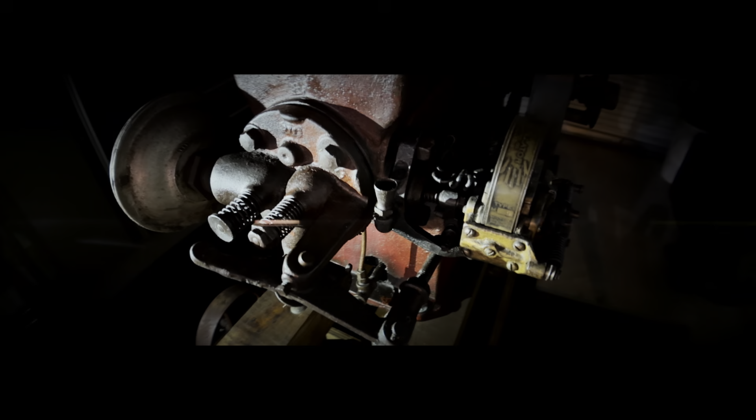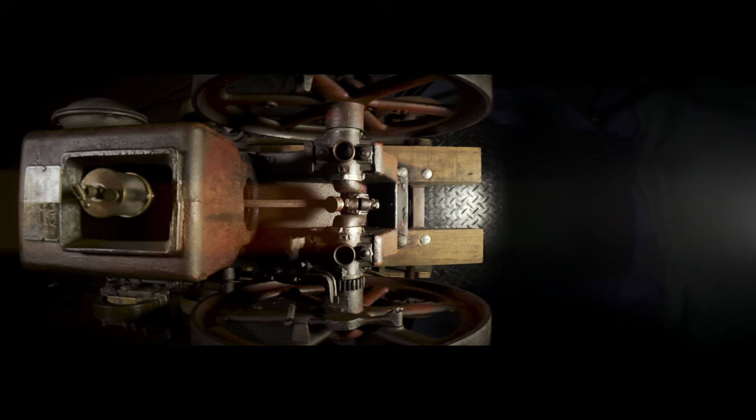This old thing, with all of its parts exposed and painted barn red, at least what's left of the paint anyway. This old thing is a hit-and-miss stationary engine built in 1915. And I need to tell you right now that I really like this old thing. I like it as much as a fat kid likes cake, and the last time I checked, that's quite a lot. And this old thing is up next on Shit Gets Fixed.

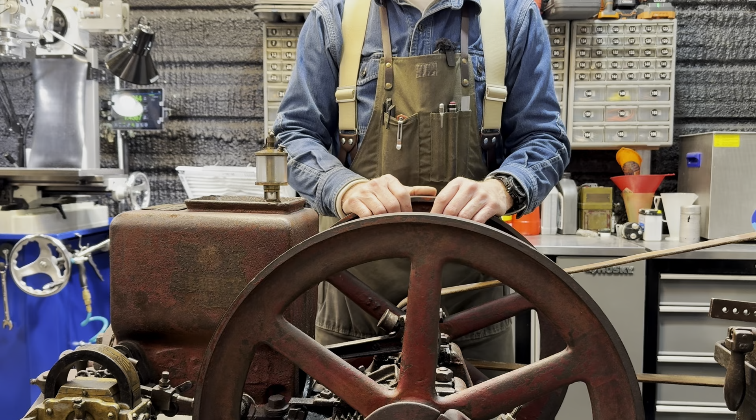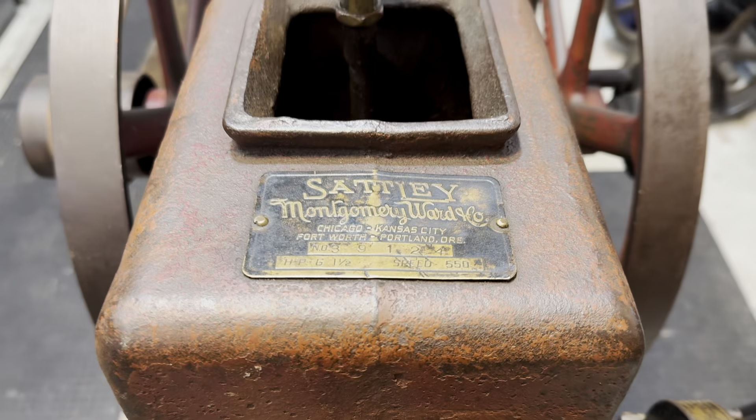We are going to fix some shit on the 1915 Sattley hit and miss. And to get us started, I have a little bit of hit and miss history for us. So, in 1915, you could order one of these Sattleys through the Montgomery Ward catalog. It even says Montgomery Ward right here on the name tag. Hit and miss engines were used from the 1890s through the late 1930s, primarily in rural parts of America. These engines would be connected to other machines by a flat leather belt, and they would run water pumps, generators, even some ran washing machines. And you could say they were nothing short of a game changer on the early American farm.

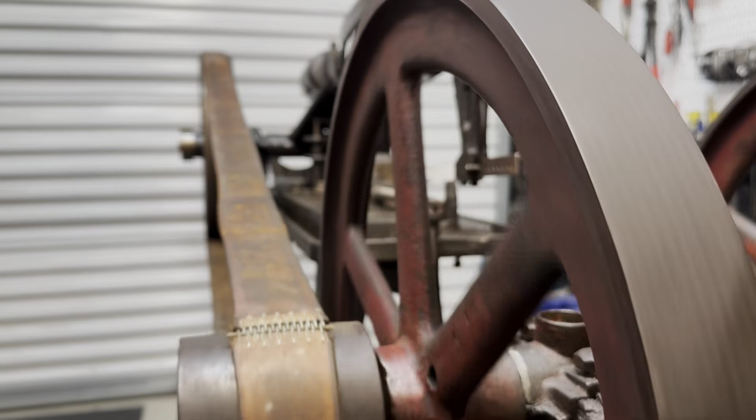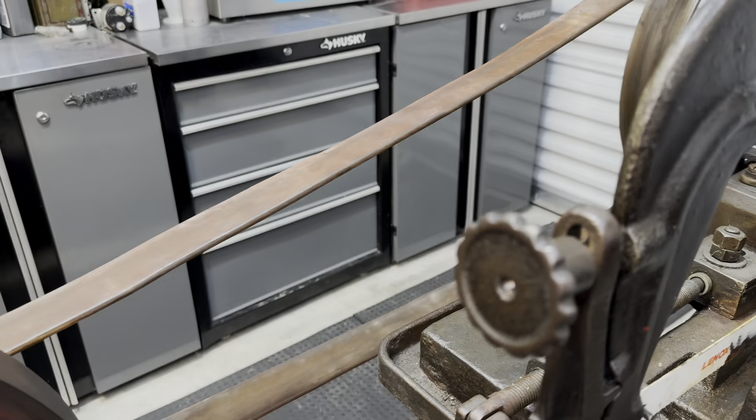And speaking of this flat leather belt interconnection, I've taken this opportunity to connect the Sattley, albeit kind of a mock-up, with this. This is a flat belt driven power hacksaw built in 1909 by the Racine Gas Engine Company of Racine, Wisconsin. I did this so you could see how hit and miss engines' power would be transferred via that flat belt to another machine, like the 1909 power hacksaw. Man, that's neat!

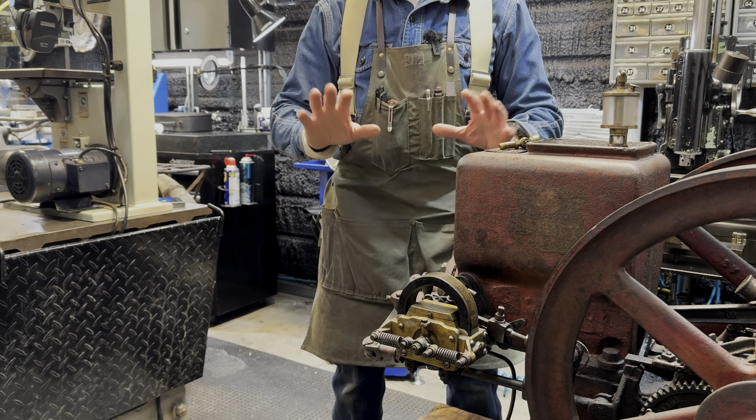So the shit we need to fix is as follows. First, we need to install this. This is a primer cup. I'll talk about what this does when we get there. We also need to set the ignition timing, but before we can do any of that, we need to do some repair work on the Webster tripolar oscillator. And no, I didn't just make that up. The Webster tripolar oscillator is actually a thing. So I'm going to get after removing the Webster from the Sattley so we can fix that shit. And while I'm doing that, I'm going to send you over to the inspection stand so you can review the typical 4-stroke combustion process, and then I'll bring you back over here so we can talk about how hit and miss engines manipulate that process.

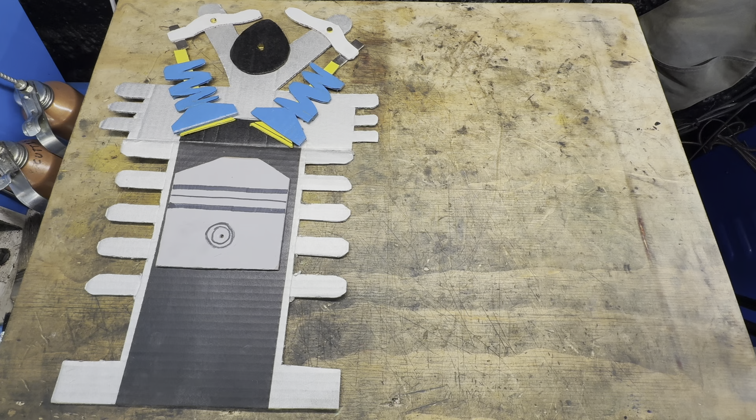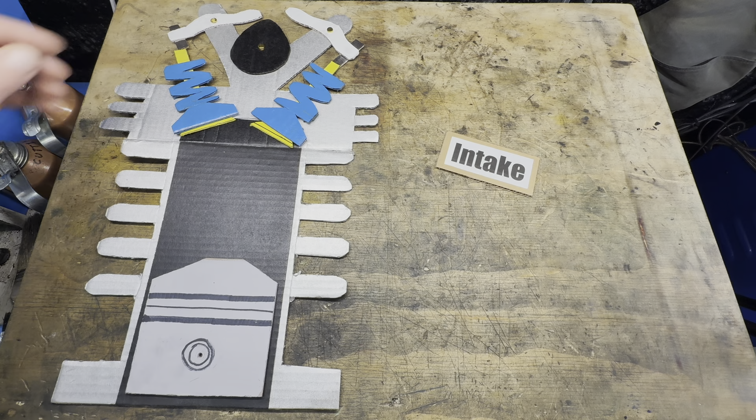The 4-stroke engine cycle involves 4 piston strokes, and the first of them is the intake stroke. The piston moves down during the intake stroke, drawing in an air-fuel mixture into the cylinder through the open intake valve. The intake valve in a modern engine is typically held open by a rocker arm, or a camshaft, or a pushrod, or some combination of them. And the air-fuel mixture is drawn into the cylinder because a vacuum happens in the cylinder when the piston moves down, much like how a syringe draws in fluid when you pull on the plunger.

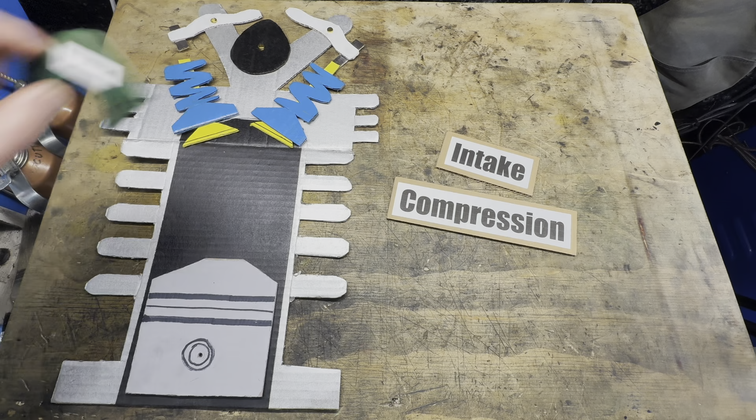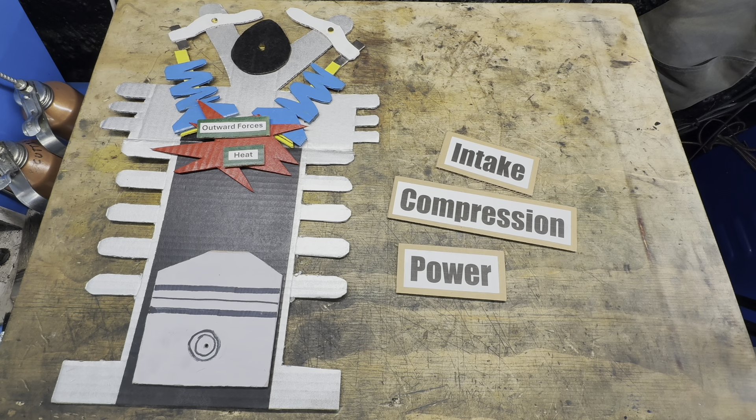Next up is the compression stroke, and just before the compression stroke starts, the intake valve closes. Then the piston moves up in the cylinder, squeezing the air-fuel mixture into a smaller space. And that leads us to the power stroke. And just before the power stroke happens, the air-fuel mixture ignites and an explosion occurs. These explosive forces drive the piston down. This power stroke is the hit in the hit and miss name given to our stationary engine. So keep that in mind as we move forward.

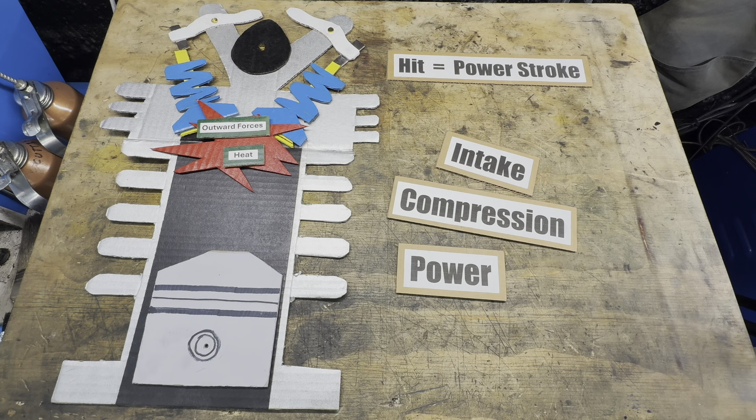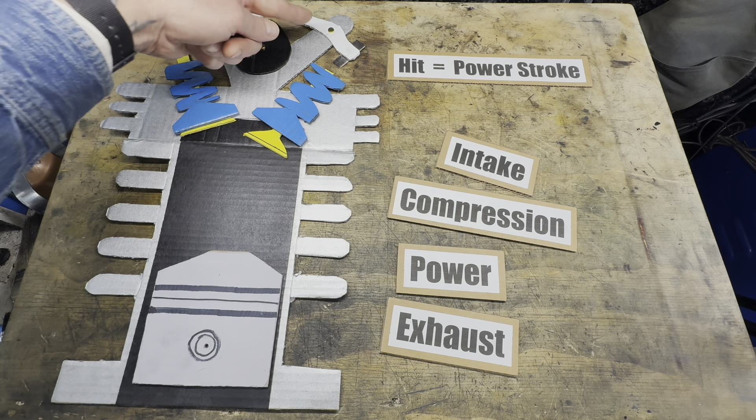Now the last of our 4 strokes, the exhaust stroke. And as the exhaust stroke is happening, the exhaust valve is held open, again by a rocker arm or a camshaft or a pushrod or some combination of them. And as the piston moves up in the cylinder, the spent air-fuel gases are pushed out that open exhaust valve, just like when we push down on the plunger of that syringe. And then the 4-stroke process starts over again.

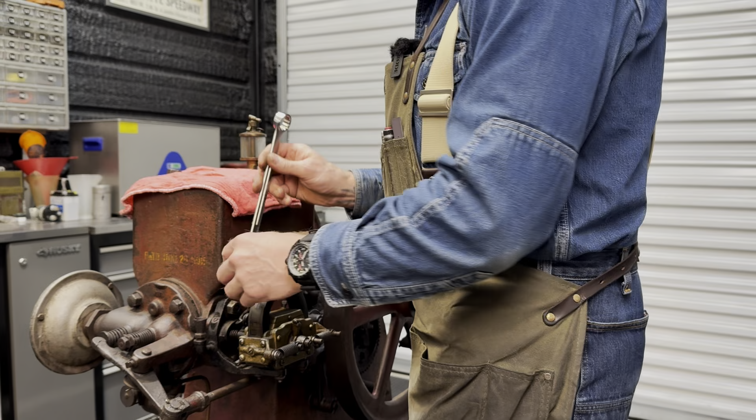That is unless you have some sort of clapped out pile of garbage that simply will not stay running. Hit and miss engines are mostly 4-stroke engines, and of course, they follow the 4-stroke process just explained. But they add one step, or maybe it's better to say they pause or halt the 4-stroke process from repeating right after the exhaust stroke, the last of those 4 strokes. And this pause or halt is the miss in the hit and miss name.

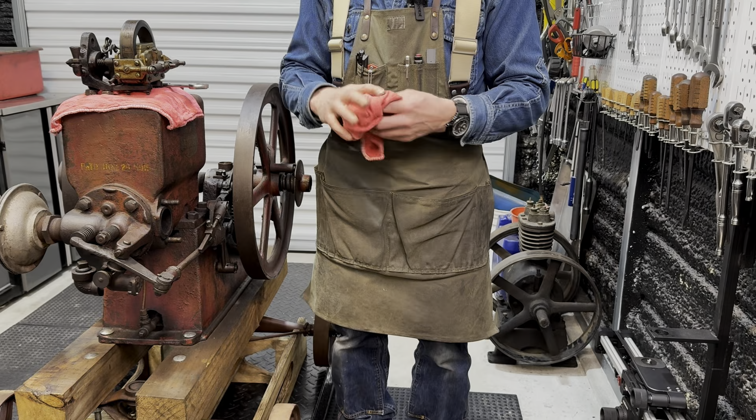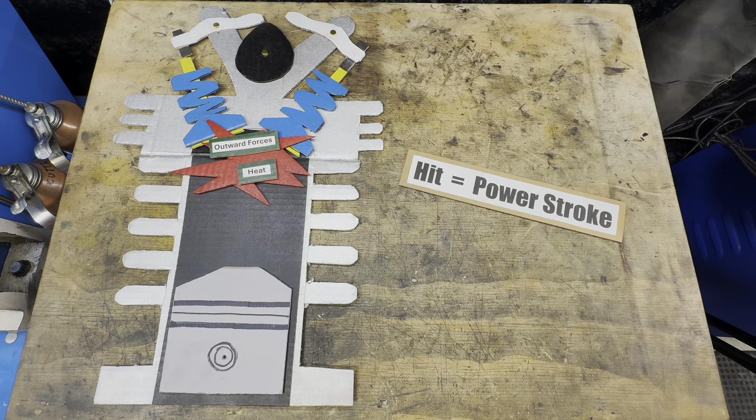Now, to be clear, the engine is still turning during this miss. In fact, they can miss several 4-stroke cycles and keep coasting along before hitting again. So now we know when the hit and the miss occur during the 4-stroke process. The hit is the power stroke, and the miss is the pause or halt of the 4-stroke process from starting over, right after the exhaust stroke.

And these engines take advantage of 3 design features to accomplish this hit and miss business. First is their mass. Hit and miss engines are big and heavy. Second, they utilize an atmospheric intake valve. And third is most of them are flyweight or flyball governed. And I will explain more about these 3 features in just a bit.

Now, I know, lots of talking here, so bear with me.

Anyway, hit and miss engines are designed to run at a specific RPM, or revolutions per minute, no matter if they're driving a machine like the power hacksaw or just sitting here running on its own. To help achieve this, they take advantage of those 3 features I just mentioned. And the first of them is their mass. In particular, their large, heavy flywheels.

Those heavy flywheels store and release kinetic energy by absorbing the power from the hit and then releasing it gradually during the miss, somewhat smoothing out the overall power delivery. This allows them to miss and coast along and not just stop dead in their tracks. Next is that atmospheric intake valve.

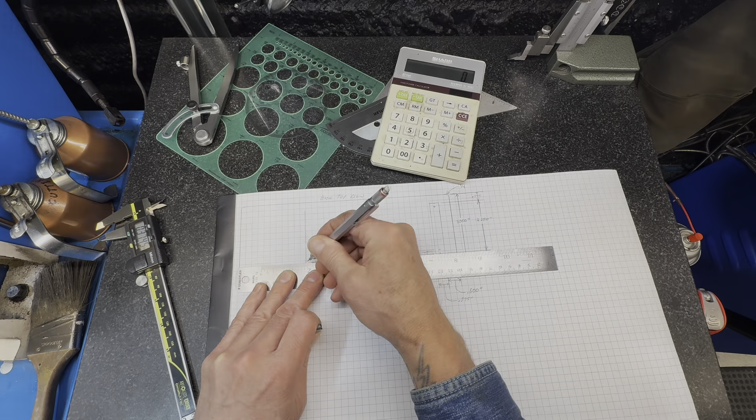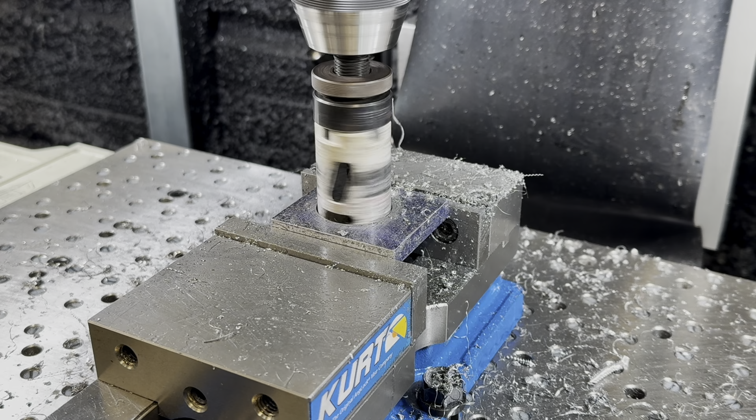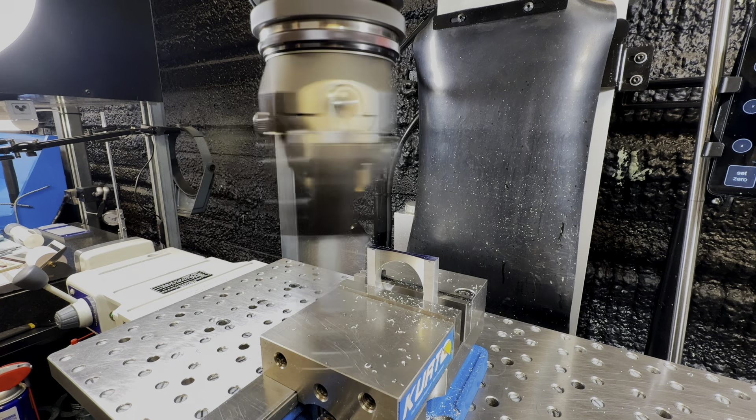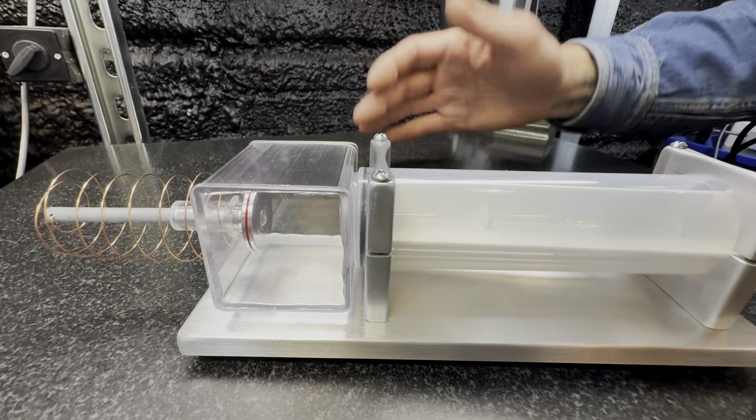And oh yeah, lots of big words there. But I have an idea to show you how this atmospheric valve thing works. This is my idea, and I call it the AIVD, or Atmospheric Intake Valve Demonstrator.

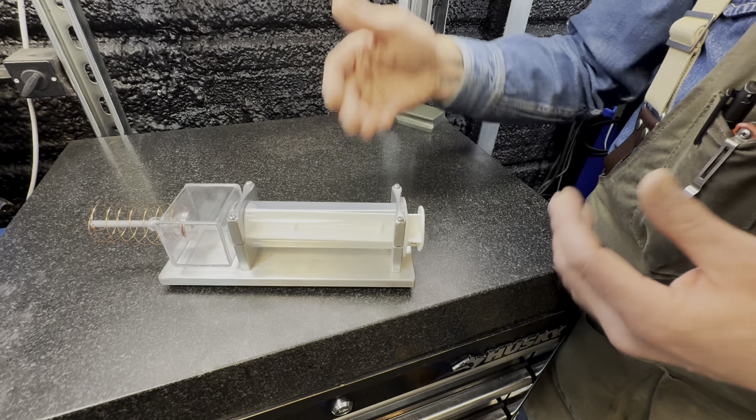So this demonstrator demonstrates how the atmospheric intake valve interacts with the intake stroke, the first of the 4 strokes at the beginning of the 4-stroke internal combustion process. And representing the piston and cylinder is the large syringe. So what I'm going to do is pull out on the plunger, and that's going to create a low pressure area or a slight vacuum in the cylinder of the syringe.

This will cause the valve to open and allow the higher pressure or atmospheric pressure, that's the stuff out here, to move into the low pressure area and equalize the two. Once they have equalized, the valve will close. Alrighty, let's demonstrate the demonstrator.

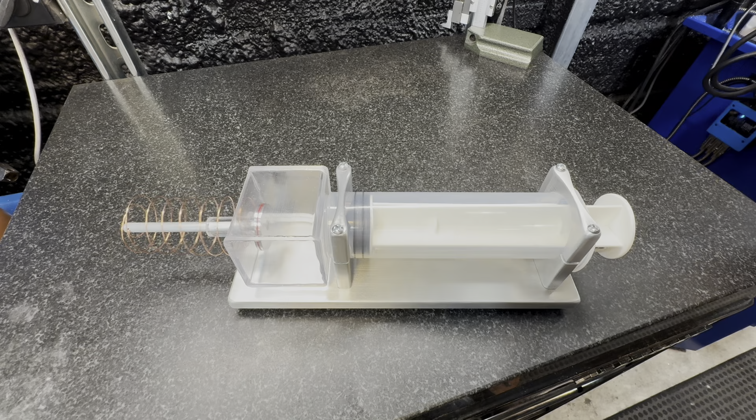So when this all happens on the hit and miss engine, what's included in that higher pressure or atmospheric charge entering the cylinder is some sort of flammable liquid vapor like gasoline. So when the piston comes back up on the next stroke, that's the compression stroke, there's an air-fuel mixture in the cylinder, and we get that explosion that will drive the piston down. That's the hit, or the power stroke.

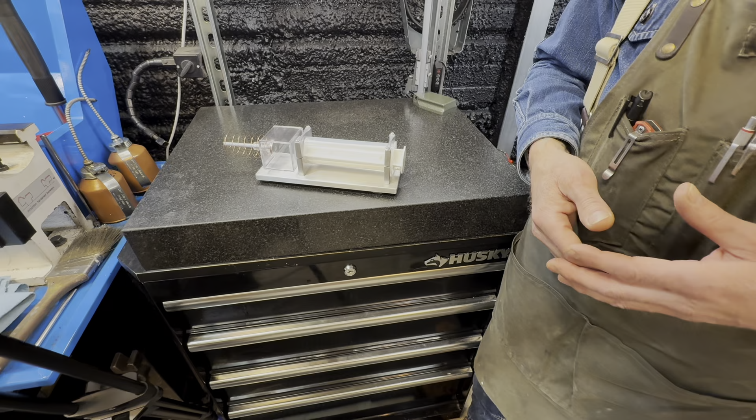Wow, is that neat! Now, for as long as I've been working around these antique engines with atmospheric intake valves, and that's the better part of my adult life, I've always assumed that the atmospheric intake valve was being sucked or pulled open by the vacuum or low pressure zone in the cylinder created as the piston moves down. Well, that assumption is wrong.

The atmospheric intake valve isn't being sucked or pulled open, but rather it's being pushed open by the higher pressure zone. That's the stuff out here. It's in the same way that exhaust gases don't get sucked out of an engine, but rather they get pushed out past the exhaust valve and out the muffler, because on the exhaust stroke, the piston is moving up in the cylinder, and it's creating a higher pressure zone, higher than what's out here.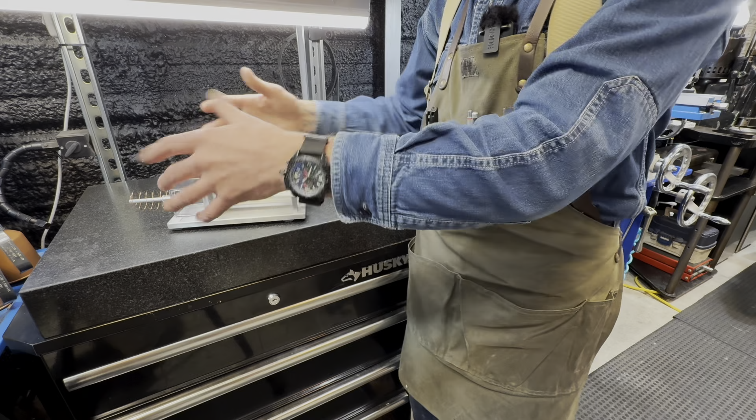I know, it's crazy, right? But if you really want to get crazy, talk to a physicist about how a vacuum cleaner works.

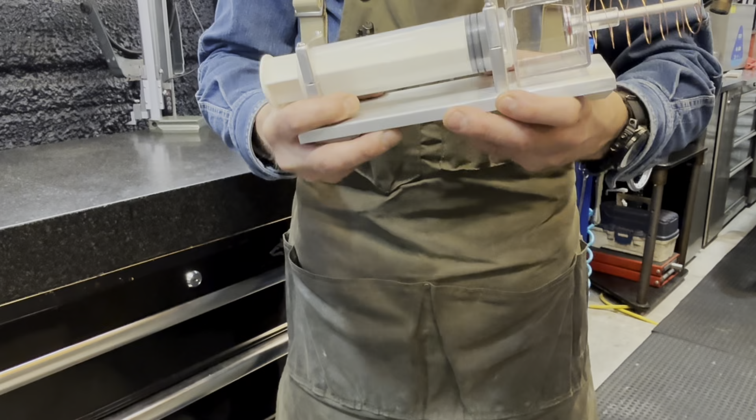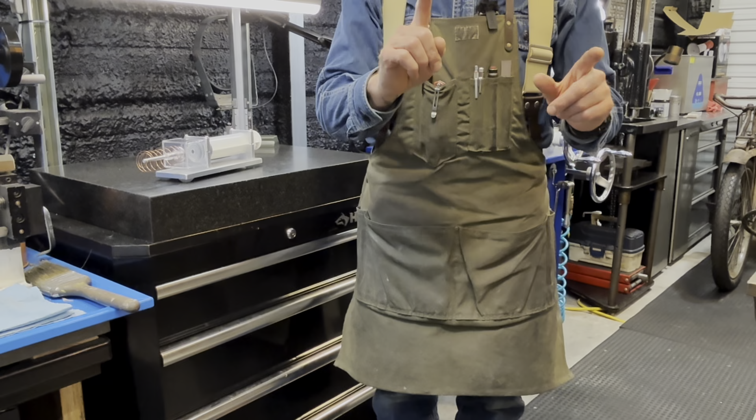So now we know how and when the atmospheric intake valve works, and the important role it plays in the hit and miss process. But it also plays a very important role in the miss. And that brings us to the last of those three features hit and miss engines utilize I mentioned way back when. And that's the fact that they are flyweight or flyball governed.

So these flyweight or flyball governing systems are made up of springs and weights, and they are under the influence of centripetal forces and are tuned to those forces to tell the hit and miss engine when to hit and when to miss, controlling the cadence or speed or how fast the engine should go, keeping it as close to its designed RPM as possible.

And that differs from, let's say, a car. In that case, the driver is the governing system. That's because cars are throttle governed. Let's head out to my driveway and I'll show you what I mean.

So this is my 1972 Volkswagen camper van. And let's say I'm driving down the road and I want to go faster. I would press down on the accelerator pedal. And then I would go faster. Now, if I wanted to slow down a little, I would let off the accelerator pedal. And I would slow down.

That's because the accelerator pedal is connected to a carburetor in my case, or a fuel injection system, or some sort of rheostat in a more modern car. And those systems control how much power the engine or electric motor produce and how fast you go. More pedal, more power, the faster you go. Less pedal, less power, the slower you go. It's kind of like a dimmer switch on a light in your house.

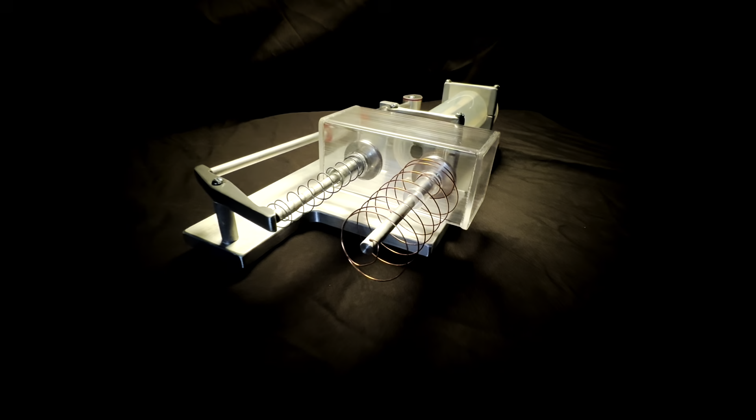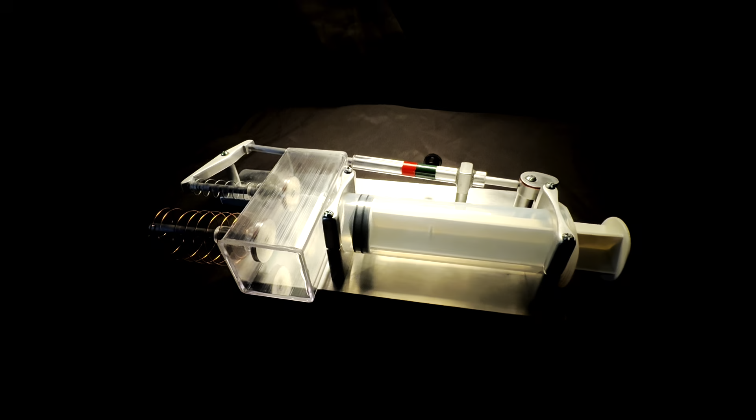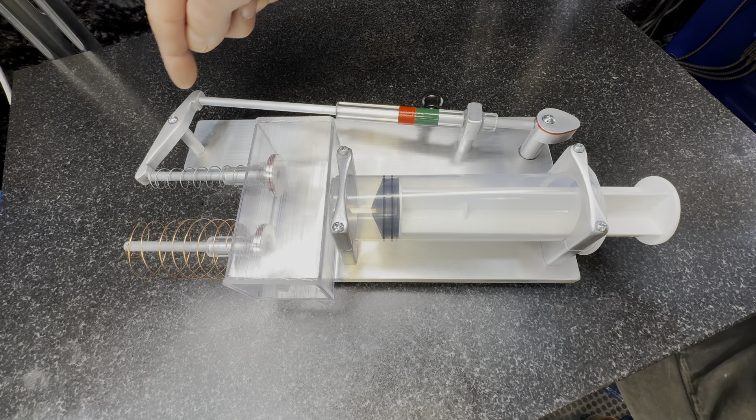Let me walk you around the highly advanced hit and miss demonstrator. We have our piston and cylinder, the atmospheric intake valve, the exhaust valve, our exhaust valve rocker arm, and push rod. This black thumb screw represents the flyweight or flyball governing system. The green zone represents when the hit and miss engine is turning at or below its designed RPM. And the red area represents when the engine is turning way too fast or over its designed RPM. And last but not least, we have our camshaft.

So this demonstrator demonstrates the step-by-step hit and miss process. And first up is when our stationary engine is operating at or below its designed RPM speed. And we start with the intake stroke. And you can see that the atmospheric intake valve did its thing. Next, the compression stroke, then the power stroke. Now the cam does its thing and it pushes the push rod, which rocks the rocker and opens the exhaust valve. Then finally, the exhaust stroke.

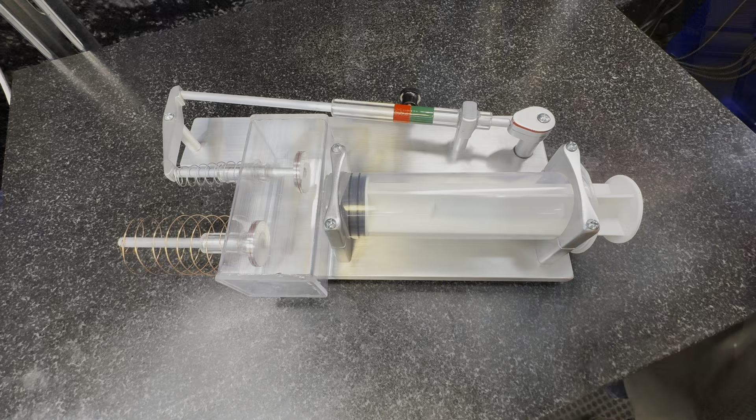And this process repeats as long as the hit and miss engine is at or below its designed RPM. And this hit, hit, hit without any misses usually occurs when we are under load or connected to another machine. Next is the step-by-step process when our stationary engine is operating too fast or above its designed RPM. But first, we need to get our hit-and-miss engine going, and we need at least one hit cycle to do that. So first is the intake stroke, and the atmospheric valve does its thing. Then compression, then power. Now the cam does its thing and pushes the push rod, which rocks the rocker and opens the exhaust valve. And finally, the exhaust stroke.

And because we are not connected to another machine, our hit-and-miss engine is now turning way too fast. It's above its designed RPM. And the flyweight or flyball governing system does its thing. And its thing is to hold the push rod in its pushed position. And that holds the rocker in the rocked position, which holds the exhaust valve open. And now we are in that miss mode, that pause or halt after the exhaust stroke.

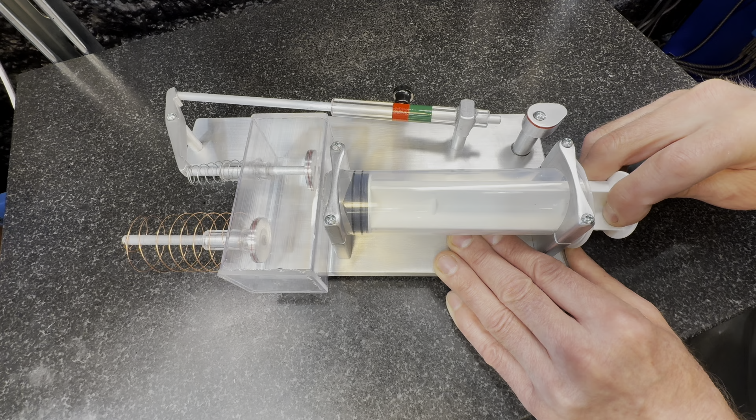And this is what happens. Intake, compression, power, exhaust. Intake, compression, power, exhaust. Nothing happens. We just coast along. It's because the exhaust valve is held open by the governing system, and we can't develop a low pressure area or vacuum in the cylinder, and therefore the atmospheric intake valve can't do its thing. Intake, compression, power, exhaust. Intake, compression, power, exhaust.

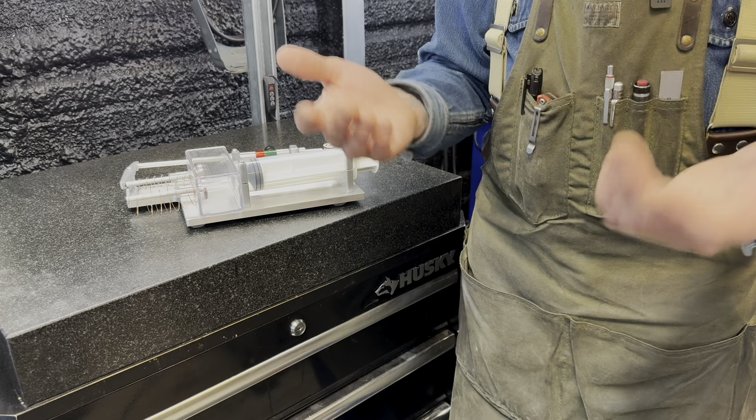Nothing. But sooner or later, our big heavy flywheels will release that stored kinetic energy, and our hit-and-miss engine will slow down and start to turn at or below its designed RPM. And then the governing system releases the push rod, and the rocker unrocks, and the exhaust valve closes. And then the next time around during the intake stroke, the atmospheric valve does its thing, and we get a hit cycle. And this dance between the hits and the misses repeats. Man, is that neat! Yeah, that is pretty neat.

And now we know how hit-and-miss engines manipulate that four-stroke internal combustion process, and how they utilize those big heavy flywheels and that atmospheric intake valve and those flyweight or flyball governing systems to do it.

And I've spent way too much time talking about all this, so I think we should take a break here. Let all this hit-and-miss business marinate a while. We'll come back in a few weeks and finish up all the shit we still need to fix on the Sattley in part 2. And I look forward to seeing you then.